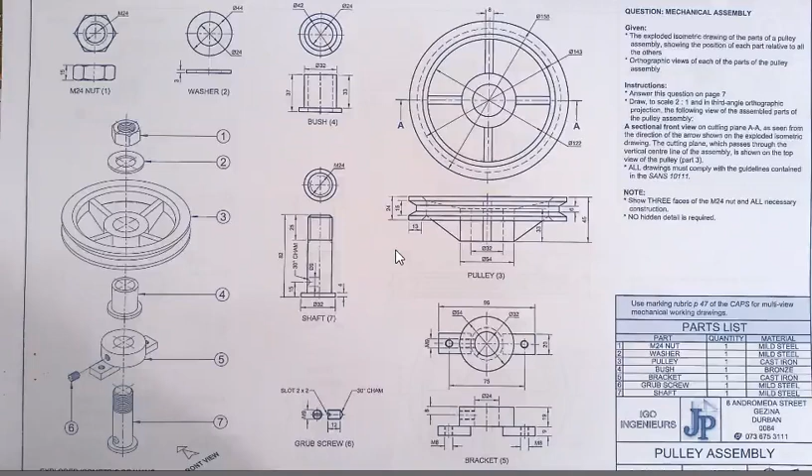Okay, graad 11, grade 11, so I'm gonna show you guys what to do. Okay, so eerste dinge eerste, we need some steps to answer this thing. We're gonna do this over 2 days, and then you should be able to do an assembly drawing.

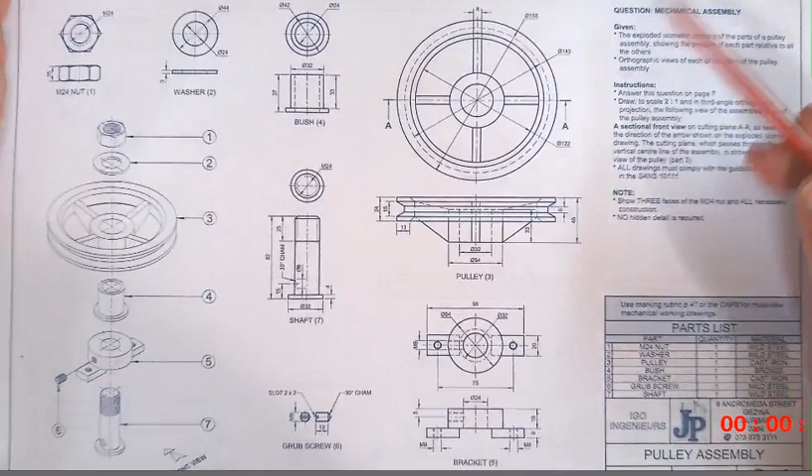Okay, first of all, if you get a drawing like this, the first thing you do before you do anything else is you go and have a look at what's down here. This is your first step. Okay, so right here, this is step number 1. You have a look at what is provided. Very important, you check what is the front view. This is very important. So jy gaan daar vir jouself skryf wat is voor.

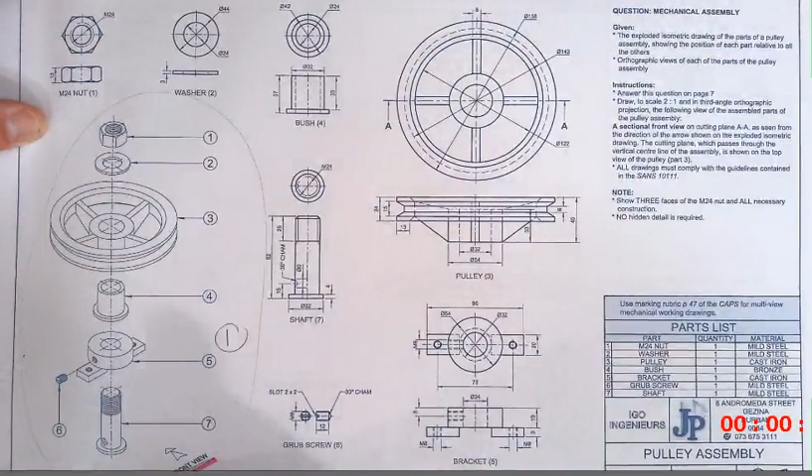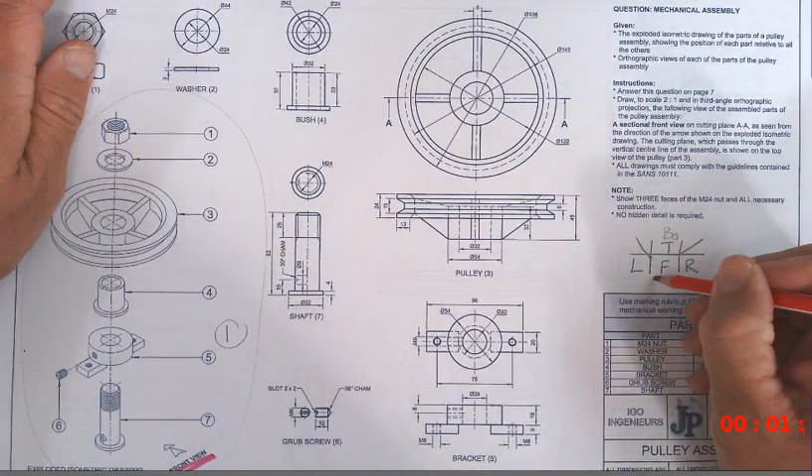So hulle sê vir ons, they tell us that this part fits through that part. We can see it. You see a little hole there. We analyze this. We see this hole has thread in it, so that can go in there. We see a little hole there at the bottom, which tells me that most probably this screw is going to end up within that thing there.

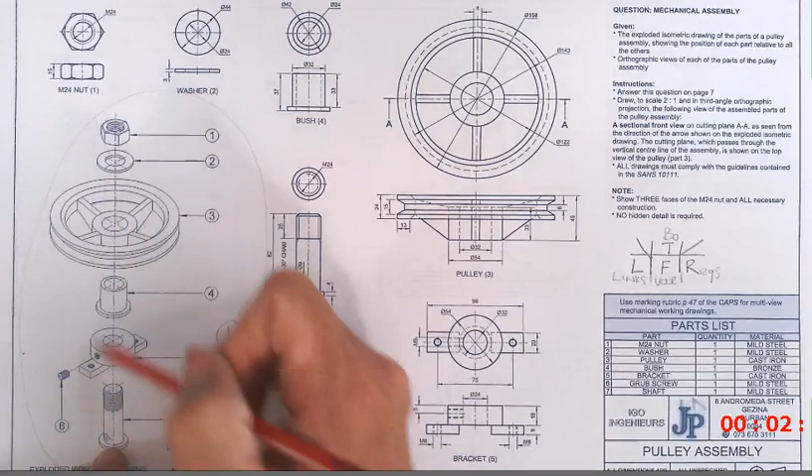Okay. Then we have a bush. This part, it fits into the pulley. We've got a washer on the top. We've got this screw thread protruding through the pulley and through this part at the bottom, through the bush, and the washer is going to be on the top, and the nut is going to turn onto this thing. Okay, so this is basically what's going to happen. All these things are going to be compiled into one object, and then we're going to cut it.

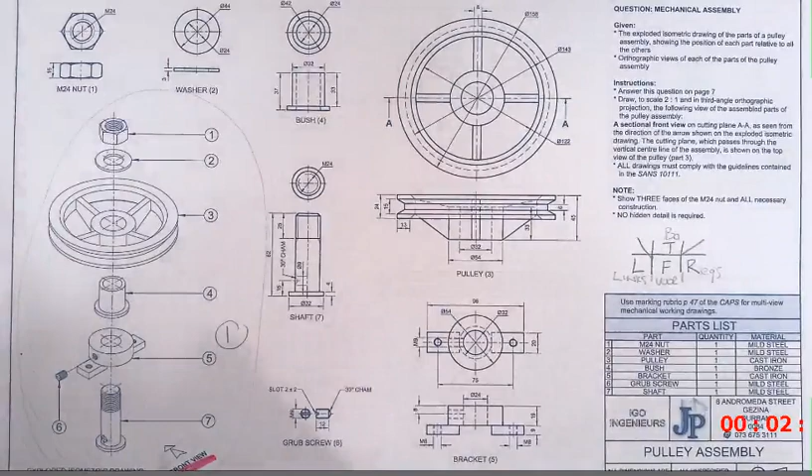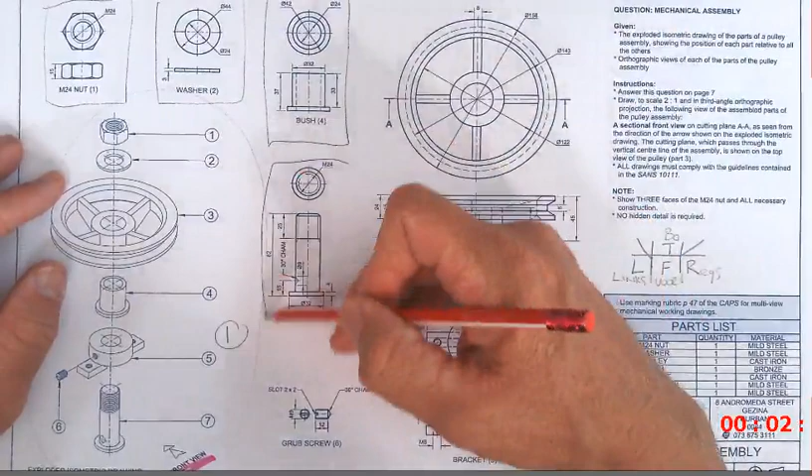So let's quickly read the question. Die vraag sê, the exploded isometric drawing of the parts. Orthographic views of each of the parts of the pulley assembly. So you guys can do this. This is one part, number 4. This is one part, number 7. This is one thing, part number 3. This is one thing, part number 5. And this is one thing, part number 6. Okay. Daar is jou verskillende parte, né?

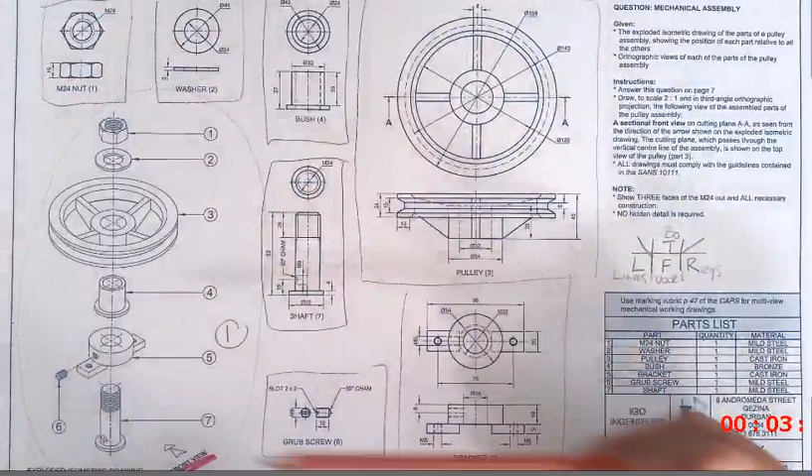Now in each instance you get 2 views of the part. Okay, so jy kry 'n voor en 'n bo-aansig, front view and top view. We get the front view and the top view, front view and top view. Okay, nou, hier's belangrik. Nou sê hulle, answer this question on page 7. Draw to a scale of, this is important. What scale do we need to draw?

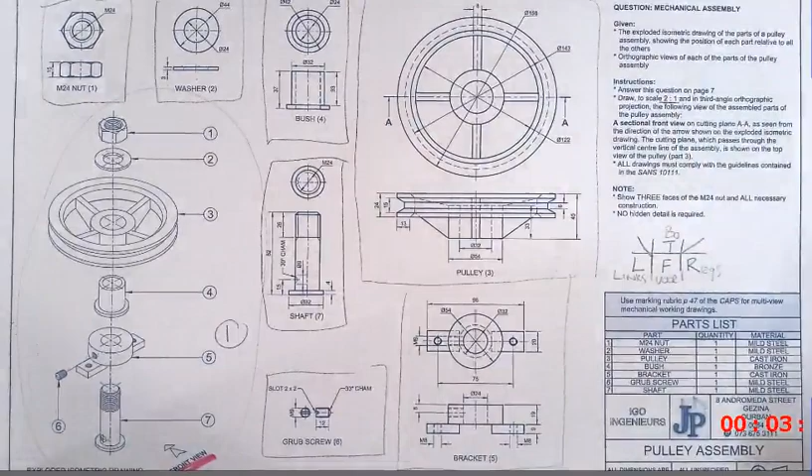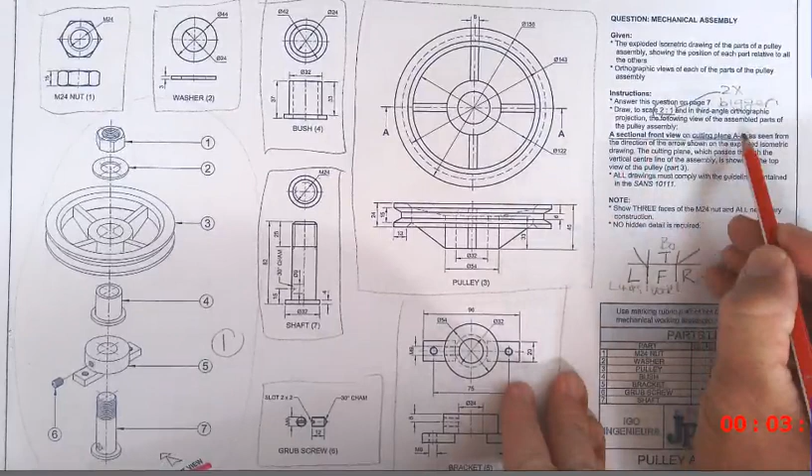2 tot 1. Wat beteken 2 tot 1? What does that mean? 2 times bigger than the provided measurement. Nee, so skryf dit vir jou neer daar. Dan sê hulle vir jou teken a sectional front view on cutting plane AA. So let's see where is cutting plane AA. Daarso, nee. Nou wat beteken dit? Dit beteken hulle sny presies in die middel.

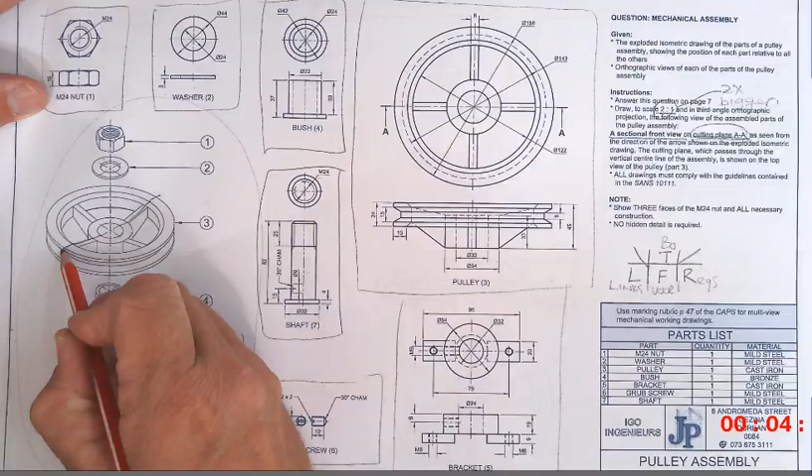What type of section is this, Baraka? This would be a full section. Well done. And so my section, if this is the front view, it would mean that my section is going to pass through here. Julle kan dit inteken daar. Going to pass through this whole thing. It's going to pass through that part there. It's going to cut through everything. It's going to cut through this part.

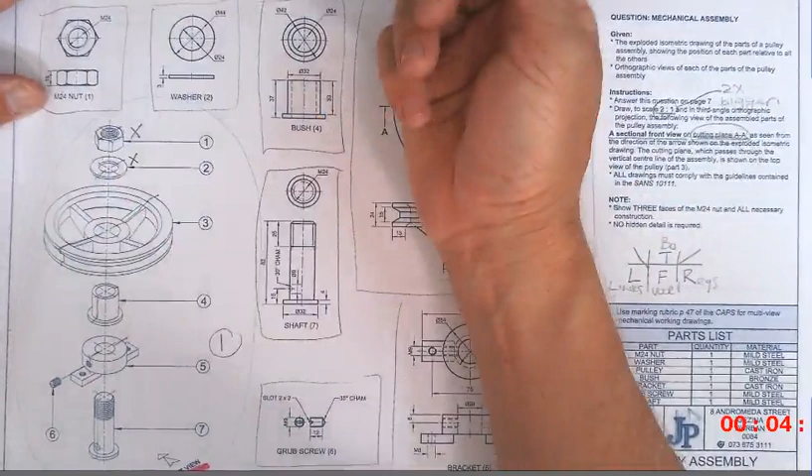It's going to cut through the bolt, although we don't cut this. It's going to cut through the washer, although we don't cut it. And it's going to cut through the nut, but we don't cut it. Okay, so let's quickly see. We don't cut the nut. We don't cut the washer. We don't cut the bolt. What type of section are we going to use around that thing? Wilmien, ons het gister gesê, wat se tipe arsering gaan rondom daai gaatjie wees? Mooi. There's going to be a part section.

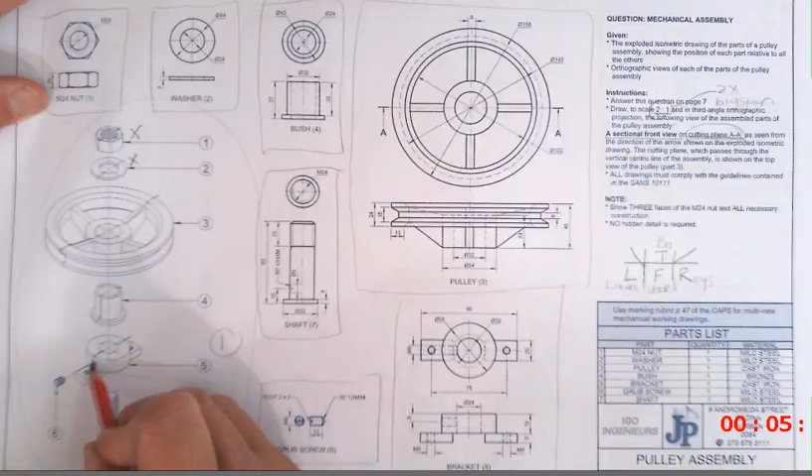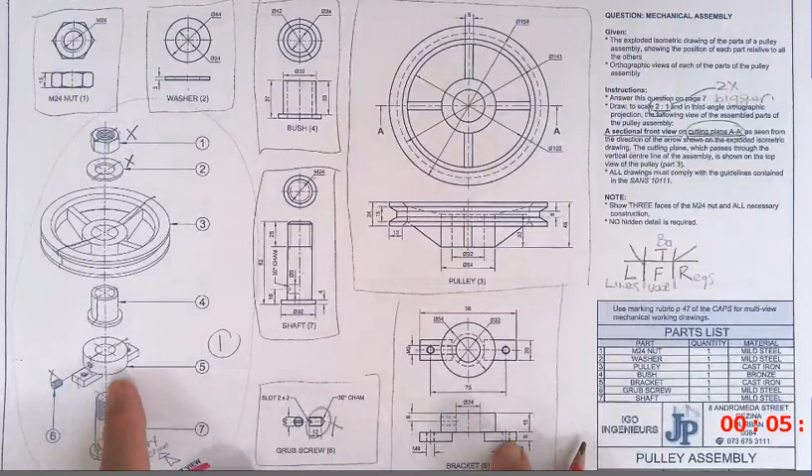We're going to cut everything and then we're going to put it together. So wat julle gou vir my skryf is, maak 'n kruisie daar, nee, we're not going to cut this, encircle that view because this is what you see from the front. If you guys look at this is part number 5, we're going to see this view. Okay, so daai ene kan jy omkring, hy gaan gesny word.

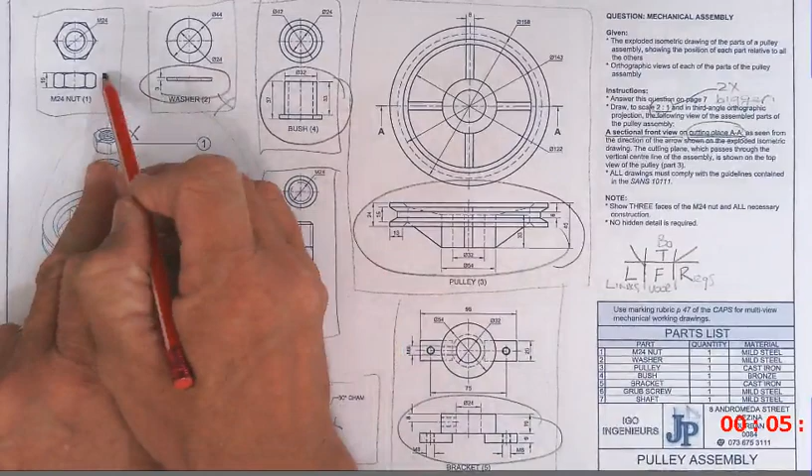We're going to cut this thing here, the bush. Okay, we are going to cut through the pulley, which is this one. We're going to have the washer, but we're not going to cut the washer. We're going to have the nut, but we're not going to cut the nut.

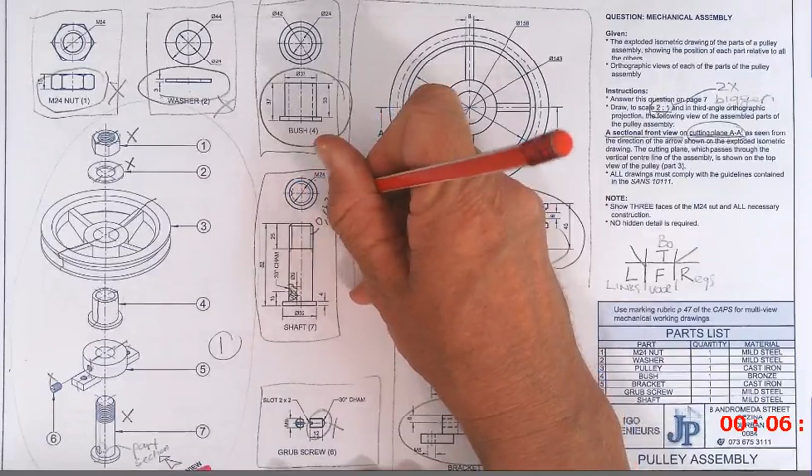You guys are going to do a part section there. Going to hatch around that little thing there. The screw thread here is going to be, write this in, 0,1 times 24. Why? Because it's a M24 bolt. Wat beteken dit? M24 means that it's from that line there to this line there, it would be 24. Het julle dit? So the screw thread there is going to be 0,1.

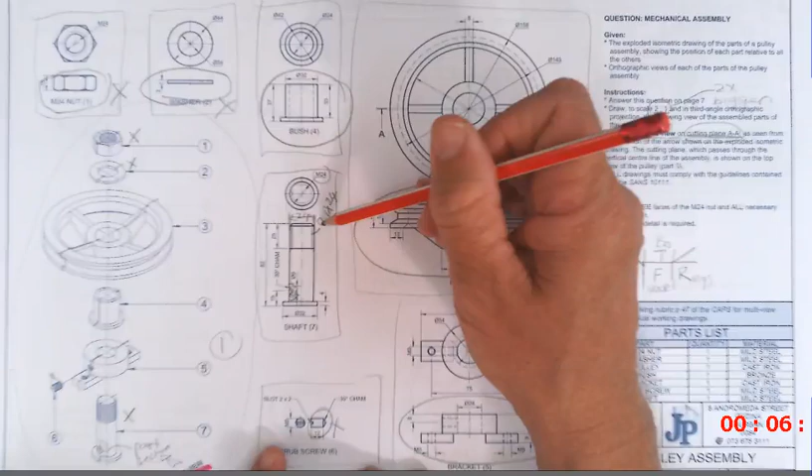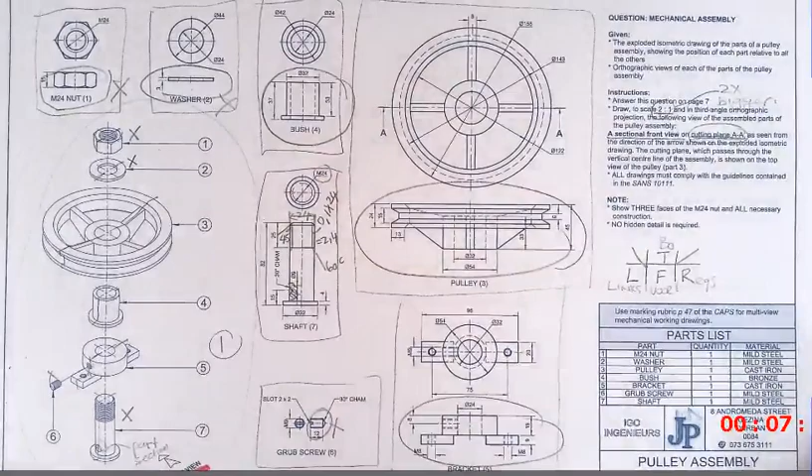What is 0,1 times 24? Equals 2,4. Okay, this is going to be a 60-degree line. That is going to be a 45-degree line. Okay, julle, nou kan ons begin om te teken. So ek wil gou vir julle vra, waar begin ek nou? Where do I start with my drawing? I need to draw the sectional front view. Okay, wat moet ek nog teken? Anything else? No, that's the only thing that you have to draw.

Okay, so kom ons kyk gou, hoe gaan ons dit doen? Ek gaan hom gou vir julle mount, gonna mount it for you. Okay julle, so we are back. I'm gonna quickly show you guys what to do. Unfortunately, I have to work with a ruler and a triangle.

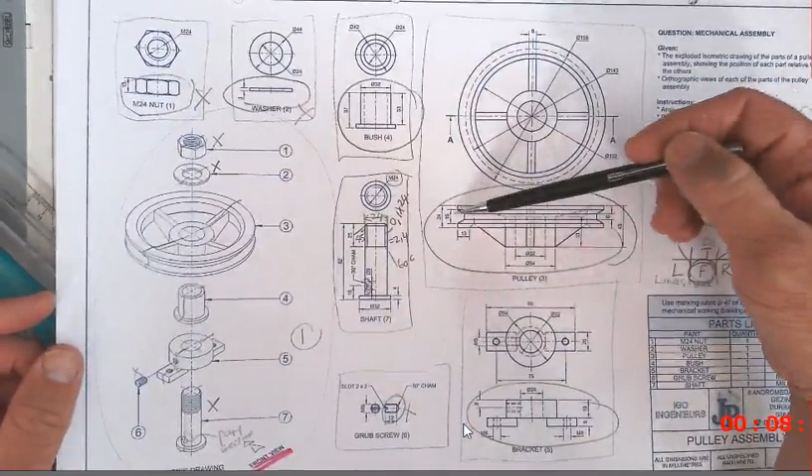But what we're going to do is we are going to start this drawing off. So the question is, where do we start? You see right through the middle there's a center line. Now I would obviously probably start at the top, and I'm going to start with this view here. And if we cut through something, we're going to keep the outline, that's one way of doing it. You can start with the biggest part, or you can start with a shaft. That's also a nice place to start.

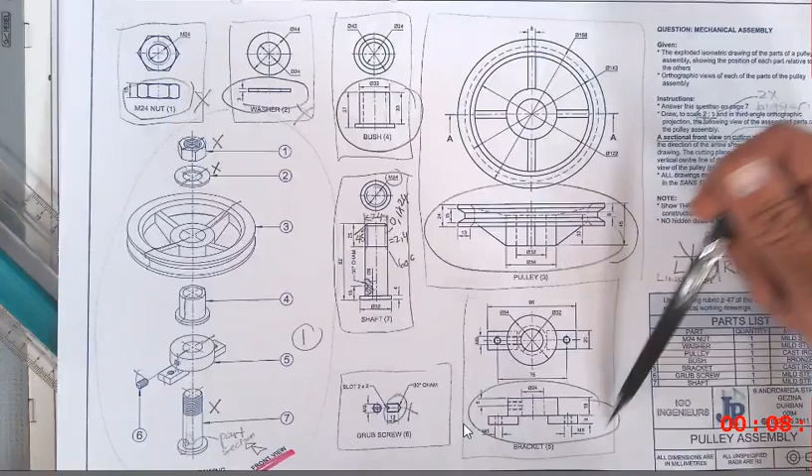So if we start with a shaft, or with this part here at the bottom, these things will all be assembled. So this is going to go into that part. So I'm going to start with a bracket this time. This part number 5. You can start in one of many places. Ek gaan daar begin. Remember, we need to double up everything. So the 24 becomes 48, etc. M8 becomes M16. So I'm going to start with this part. You guys can do this with me. I'm first going to draw the outline.

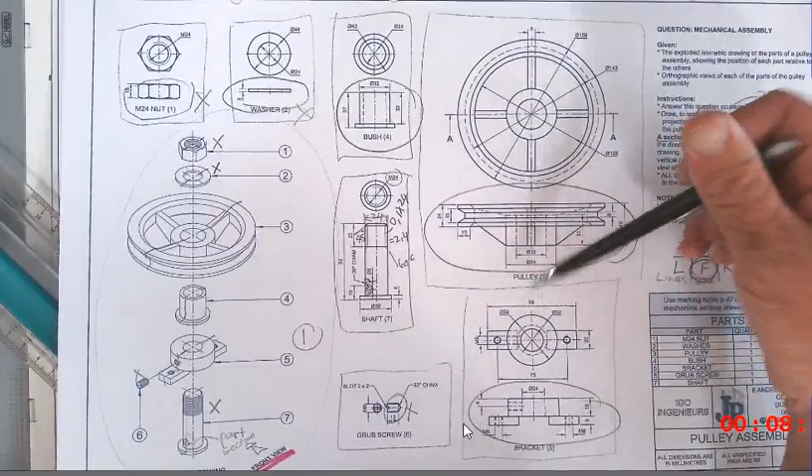And the measurement there is 96 times 2. Wat is 96 maal 2? Minus 8. So 200 minus 8. Wat is dit? 192. Is ek reg? Let's quickly check. 96 times 2. 6 times 2 is 12. 2 times 9 is 18 plus 1 is 19. So this is going to be 192. You guys can write this in.

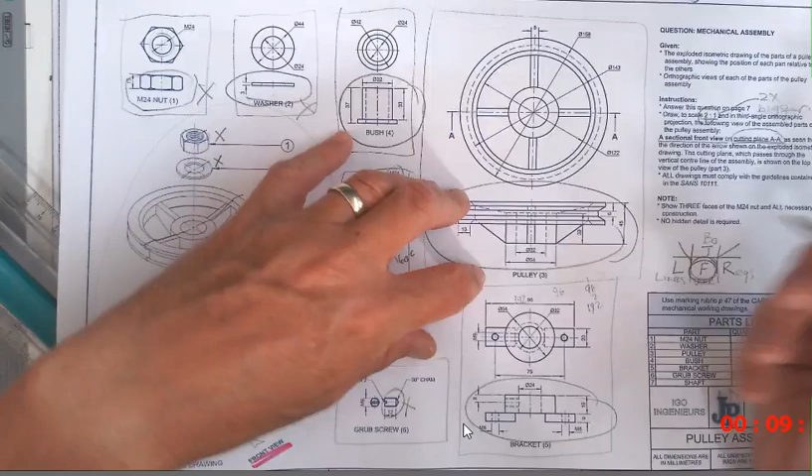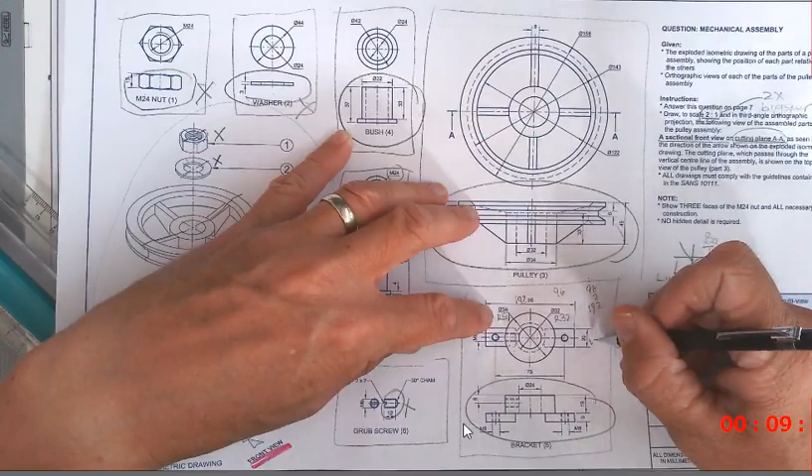This is going to be 54. Double that. What is that going to be? Oh, it's okay. Just write there radius 54, which is half of that. This is going to be radius 32. Hoekom? Because the diameter is the full thing. So this is going to be 64 diameter, which is radius 32. Okay, this is going to become 40. This is going to become M18. Okay, the thread, that 75 is going to become 150.

So I'm going to start off with a center line. I'm going to have to draw this view here. It's going to be 192 from the one side to the other side. So ek gaan daar begin. Eentjie van onderaf slightly. Well, first let's get the middle of the page.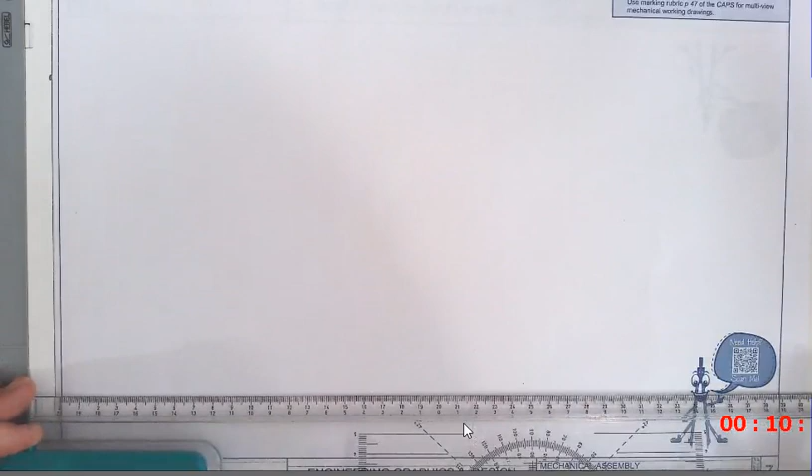So it's roundabout 400 millimeters. So I'm going to here by 200 roundabout. There by 180. I'm going to make a mark here.

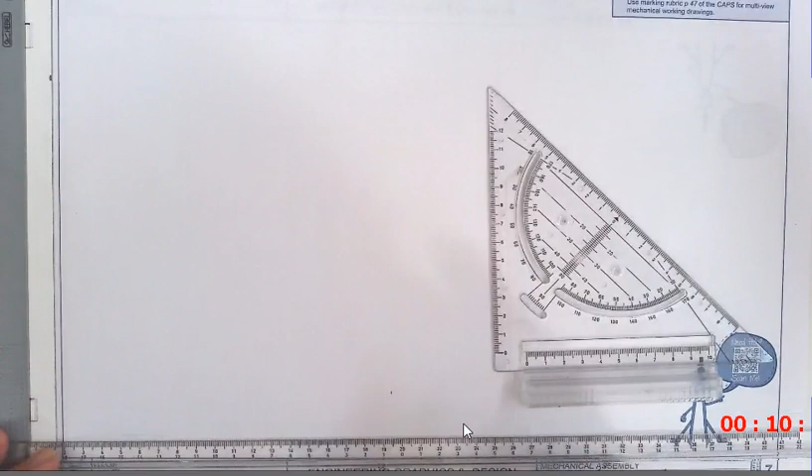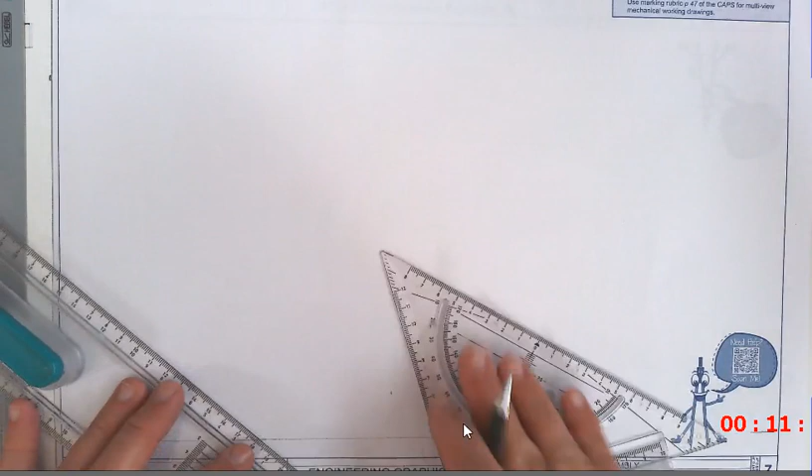Okay. Right, so I'm gonna be drawing a line here at the bottom just because my drawing ruler, this is not the correct ruler for this board. Just gonna draw a line here at the bottom. Alright, now you'll see my line is slightly angled, and I'm gonna line it up still here on the board. Okay, I'm gonna draw a center line here in the middle. Very important. So center line here in the middle.

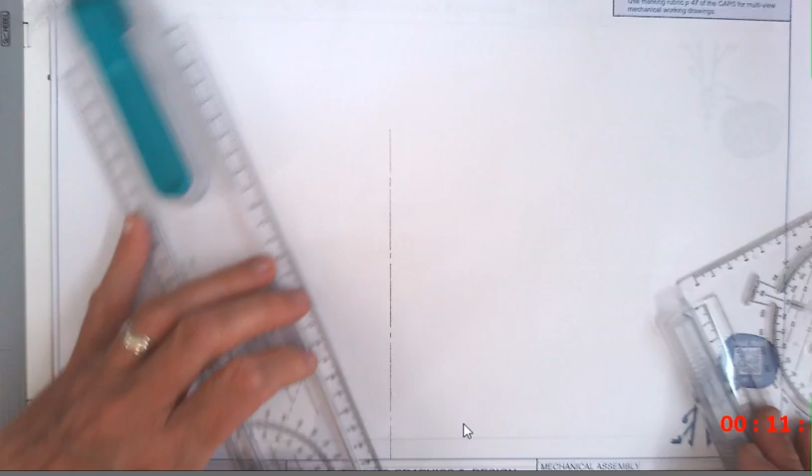Okay, now I'm making a center line. I need to have a center line. Why? Because this is my reference from which I am going to work. It's always the best to have a center line when you're starting off. Okay. And now I'm going to start with this part here. I'm going to start slightly up. It needs to be 192, so it's going to be 96 in both directions.

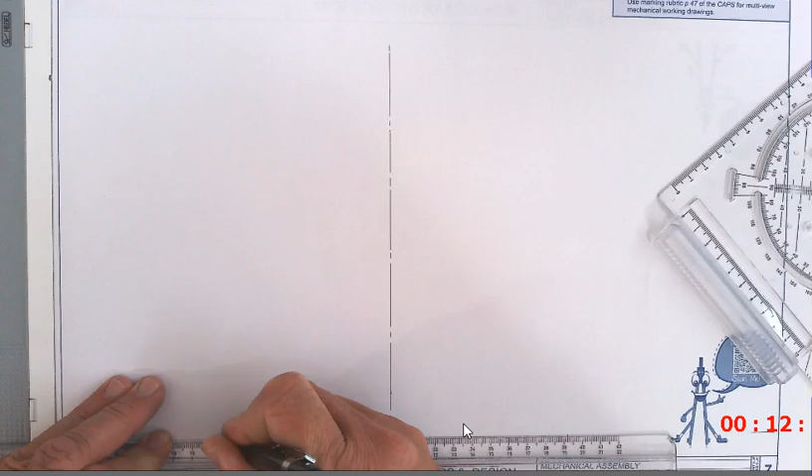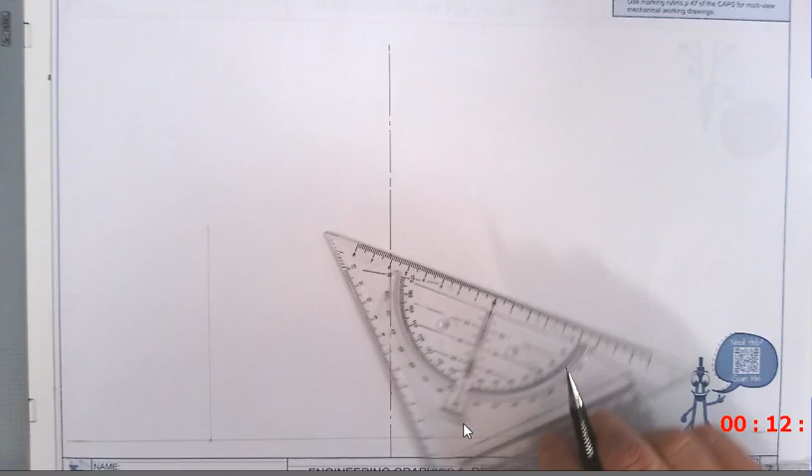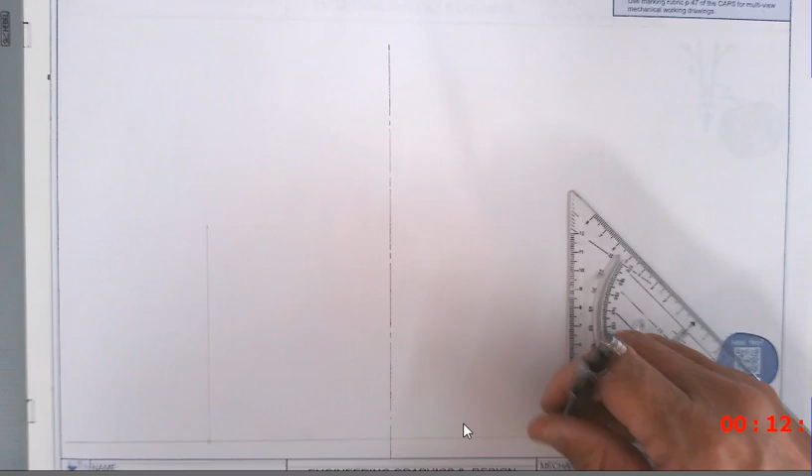96. Okay, so 10, 20, 30, 40, 50, 60, 70, 90. There's 96 millimeters. I'm going to do the same on this side. Okay, so here's my bottom line. 96, I'm just going to make a construction first. So I'm going to draw a construction line on this side. I'm going to move it up. Draw it on this side.

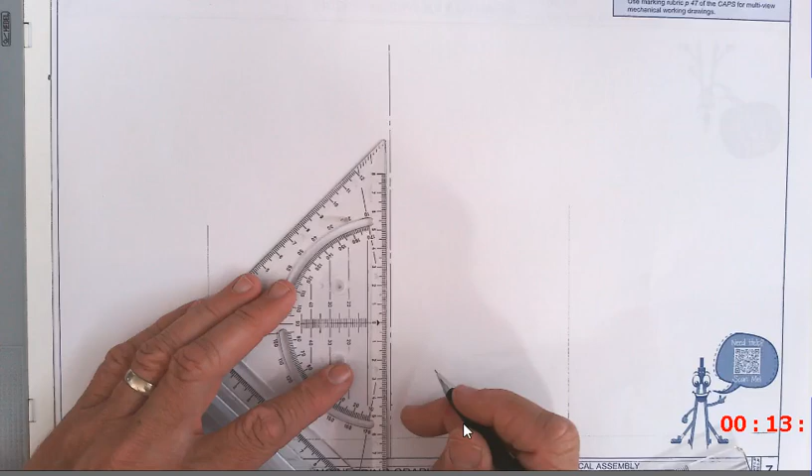This is going to be 18 and this is going to be 19 times 2 is 38. Am I right? That's going to be 38. So 18 plus 38. 18 plus 38. 10, 15, 16, 17, 18. And then another 38. 10, 20, 30, 35, 36, 37, 38. There it is, 38.

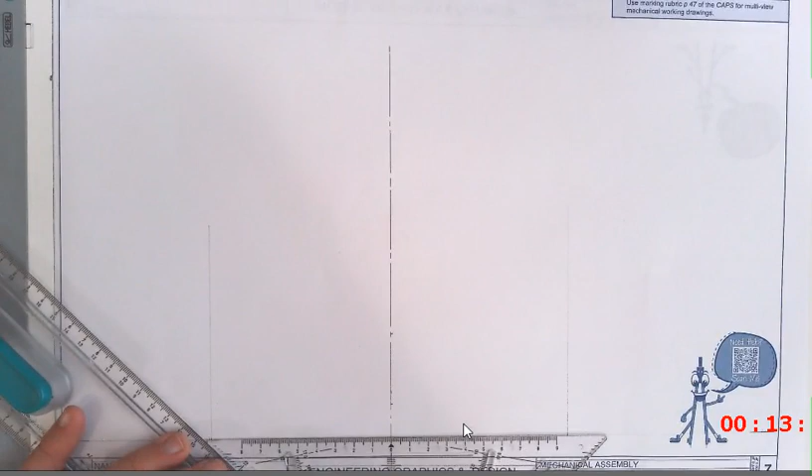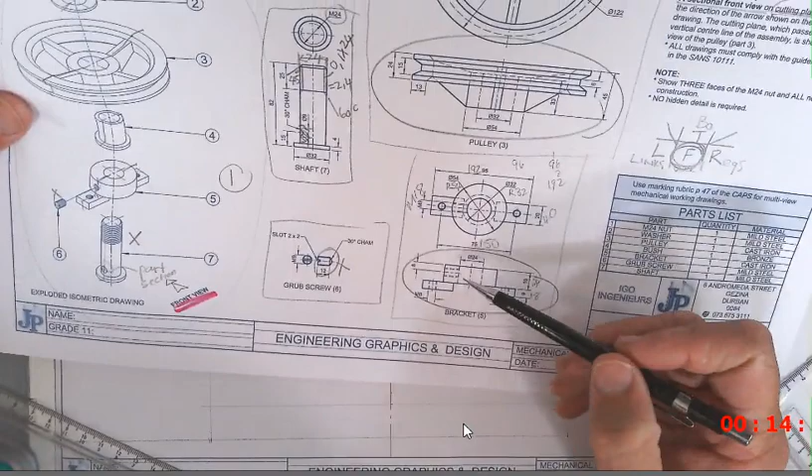Okay. Alright. Let's start off here. We're gonna draw a construction line here. Just construction lines first. Remember, we are drawing against time. So every second counts. Okay. So try and keep your drawing time shorter. Okay. We spoke about this.

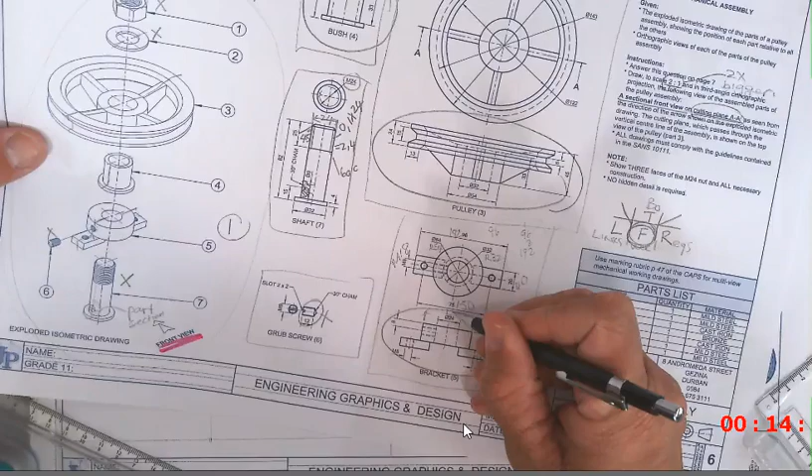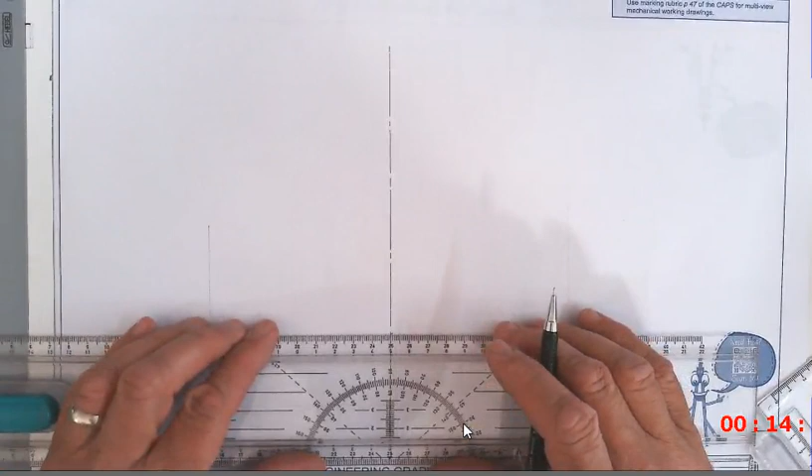This is going to be a radius of 54. But that 54 times 2 gives me what? 108, am I right? So this distance should be 108. 54 times 2. Is it right? 108. Let's quickly draw that in. So it's 54 in both directions. So we can quickly do that on this side. 10, 20, 30, 40, 50, 54 on this side. Okay.

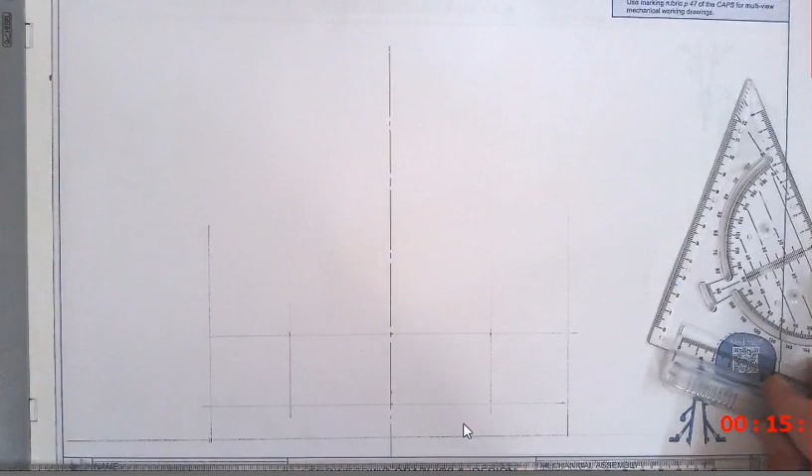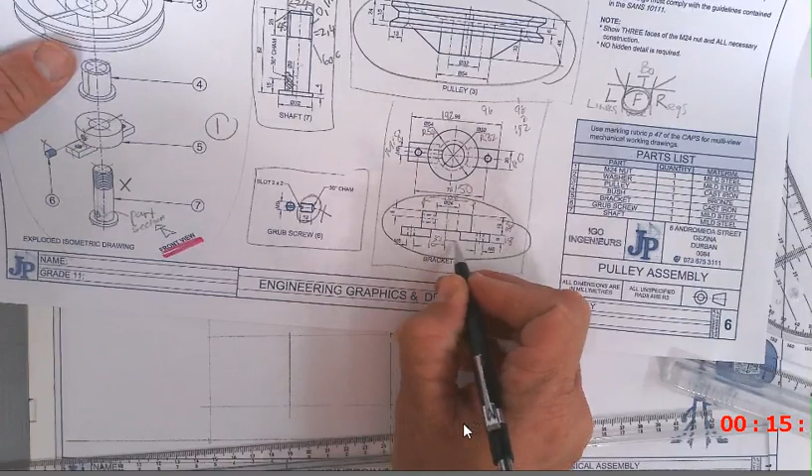That is radius 32, so that's going to be 64, so it's 32 to this side, 32. So this is going to be, from the center, 32 to the left and 32 to the right. Okay.

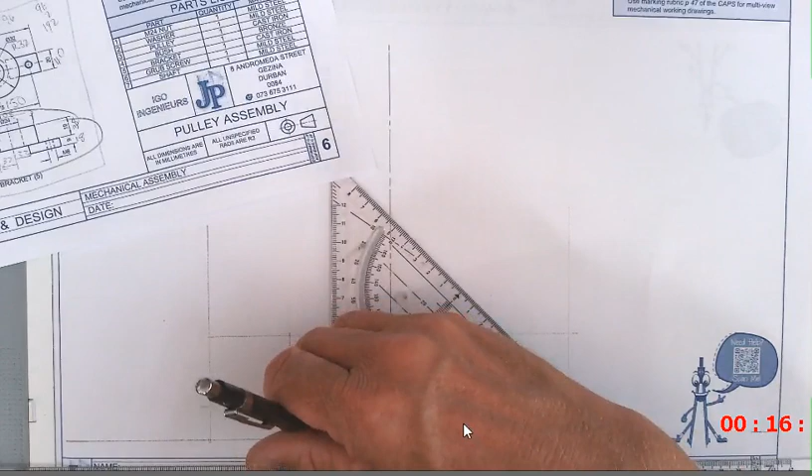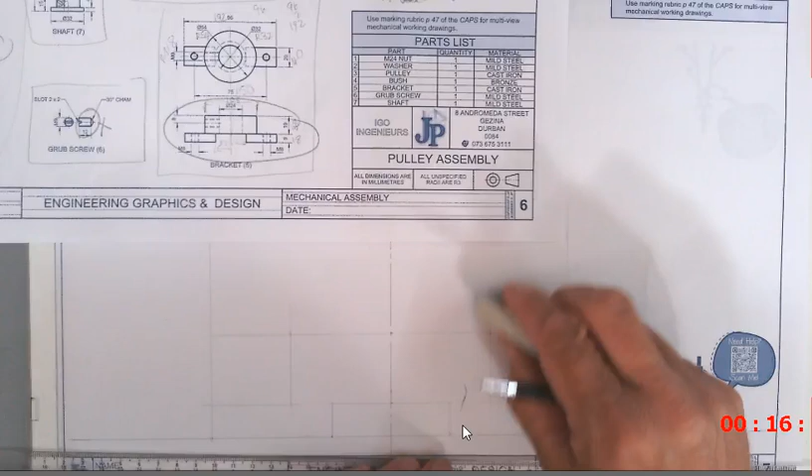Okay, now we have the outline of this thing. Now we're going to quickly cut this thing through. And remember what I told you guys, if we're going to cut this through, we're only going to keep the outline. So I can remove that line. You don't have to erase the whole thing. You don't have to erase construction lines, but just for clarity. I'm just doing it so it becomes more clear.

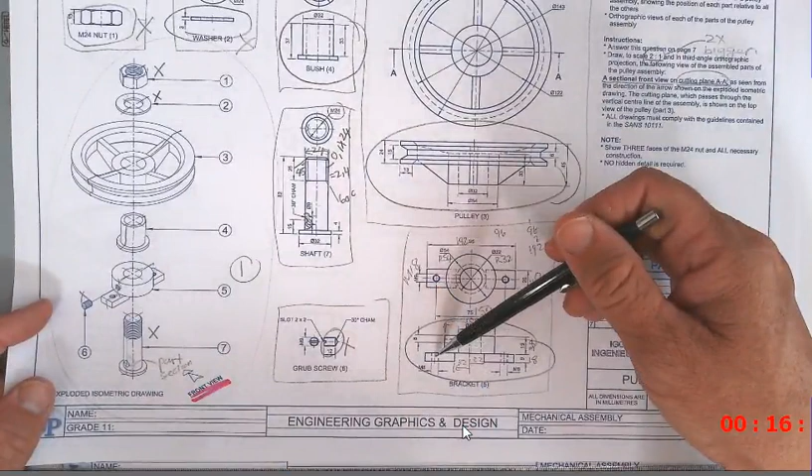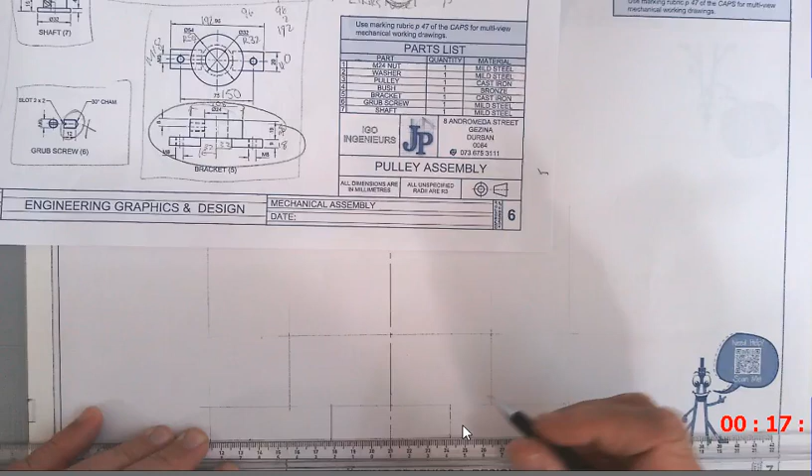Okay, so this is this bottom part. I've cut this thing through in the middle, there. I'm going to cut through the thread there and there, which means that that M8 is now M16. So that is from the side. Let's quickly have a look. It's going to be 75 to the one side and 75 to the other side because it's times 2. Let's quickly measure that off. 10, 20, 30, 40, 50, 60, 70, 75 is here. And then also 10, 20, 30, 40, 50, 60, 70, 75 this side.

Now I'm going to put in a center line.

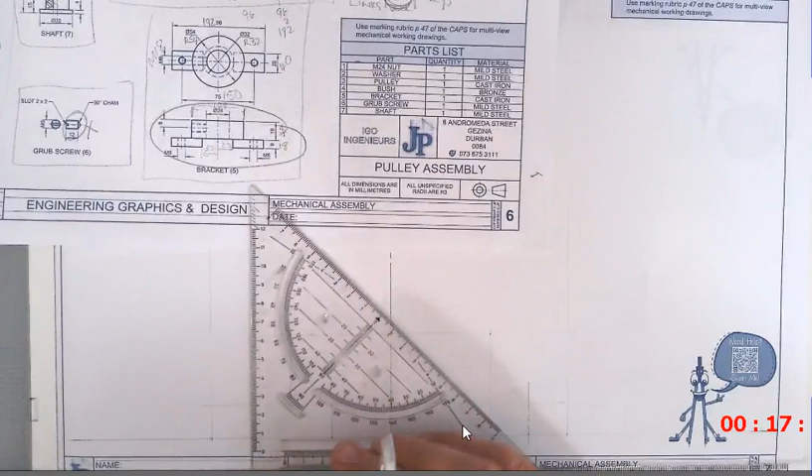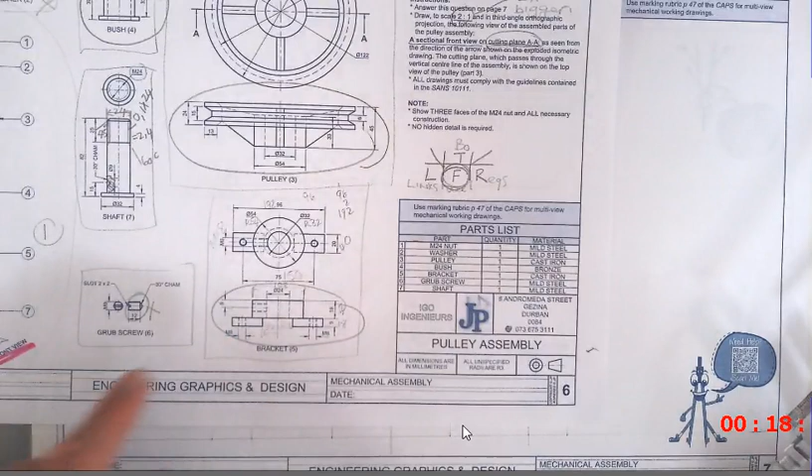Because it's the center of something round. Okay, we always put a center line where it's the center of an object or when there's going to be something round in shape there, like a circle or a hole or something solid. Okay, that's going to be M8. So that means M8, a bolt that is double that size will fit in there. Why double? Because it's scale 2 to 1. So that becomes M16. So I'm going to measure 8 towards every side here.

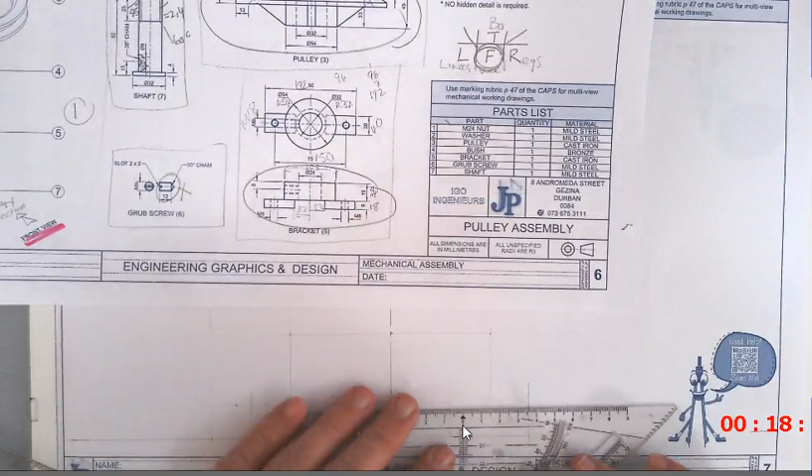On this side, I'm going to do the same on this side. 5, 6, 7, 8. 5, 6, 7, 8 on this side. And because I'm cutting through this hole, this will be a solid line. I'm going to show you guys in a moment why.

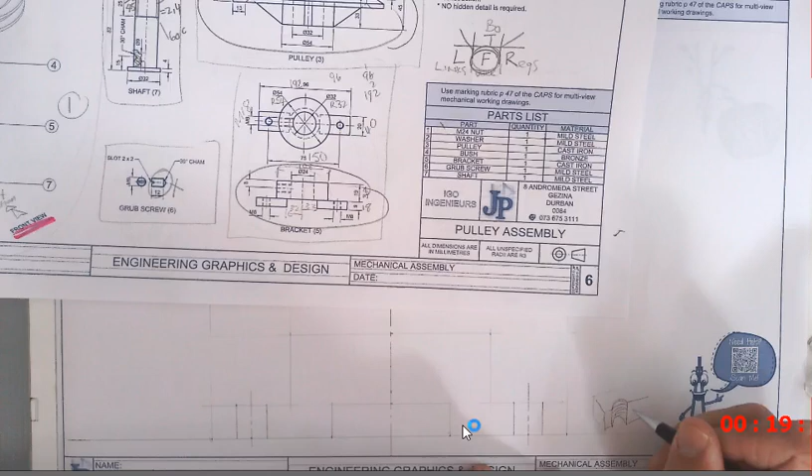I've cut this thing through now. And the thread is on the inside here. Okay, and you're going to have a double line here. Why? Because it makes a zigzag pattern there in reality. Makes a little zigzag there. And that zigzag line is drawn as a double line. But I am still having a circle there at the top and a circle at the bottom. That's the reason why there's going to be a line there.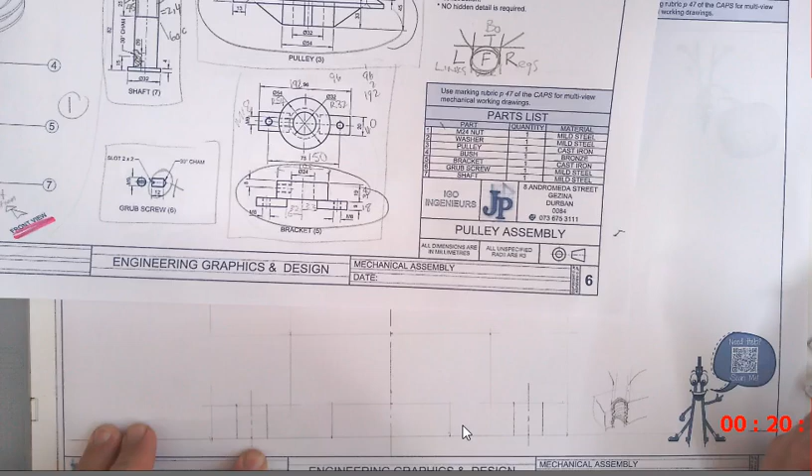That's that line. This is the bottom line, and the thread will now have a size. Because M8 is going to become M16. So this hole is 16 from the one side to the other side. The thread here will be that size divided by 10. In other words, 16 divided by 10 is 1,

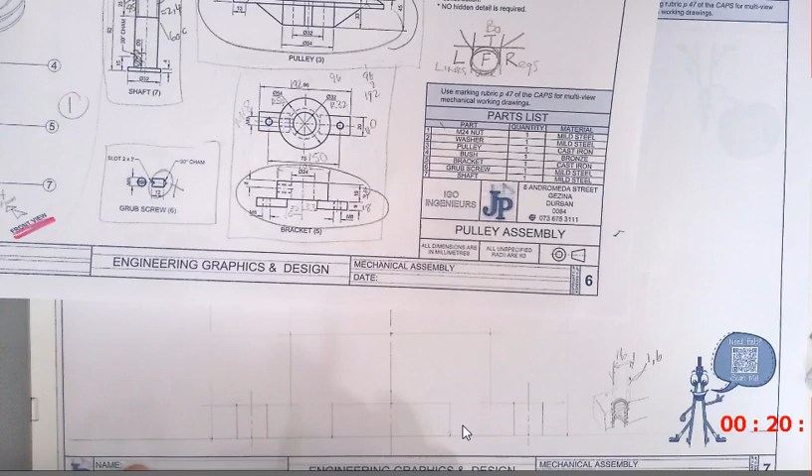So 1,6 on the one side. Inward, it's basically 1.6 millimeters.

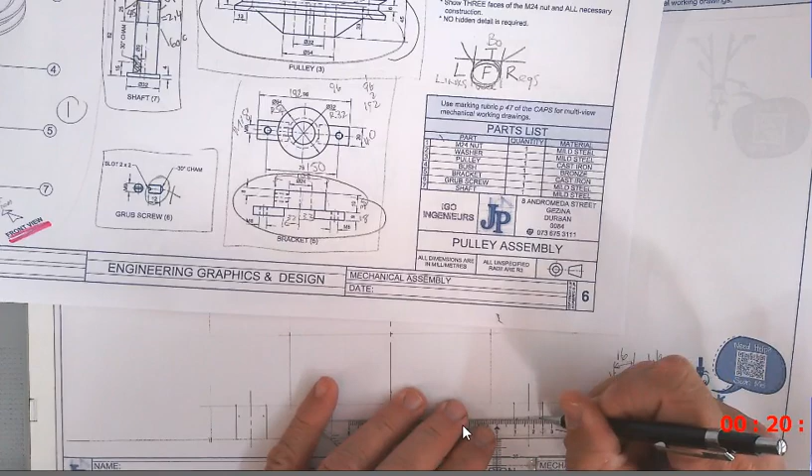This is going to be slightly faint.

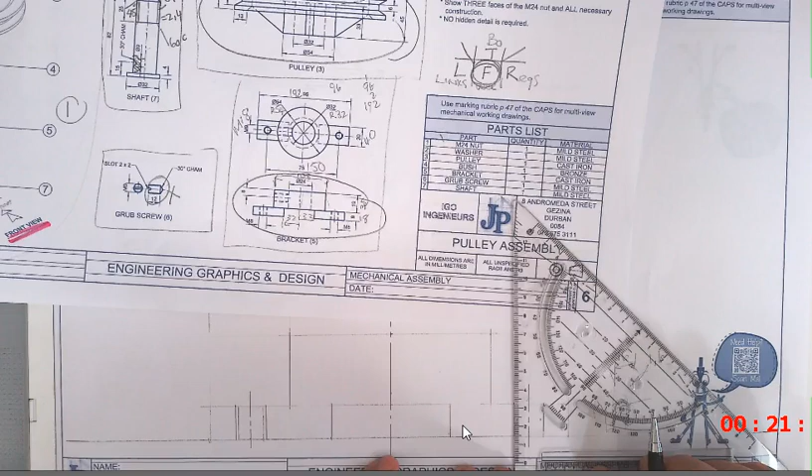Okay, so daar's die skroefdraad, there's the screw thread.

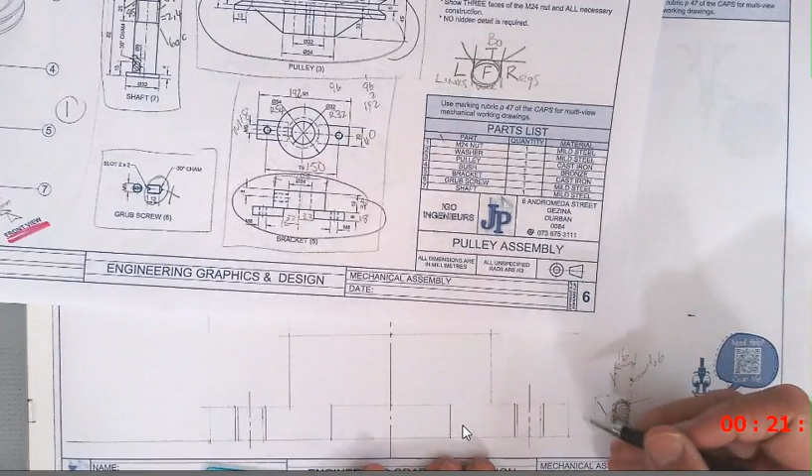Sorry guys, I see the screen is almost impossible to see on. If you guys want to come and stand here around the desk, you're most welcome. I see you cannot see. I'll be uploading this at the end of the period anyhow to YouTube. But please come and have a look here by my desk, otherwise you're not going to see anything.

Okay, so I'm going to measure off. This measurement is 8 times 2, which is 16.

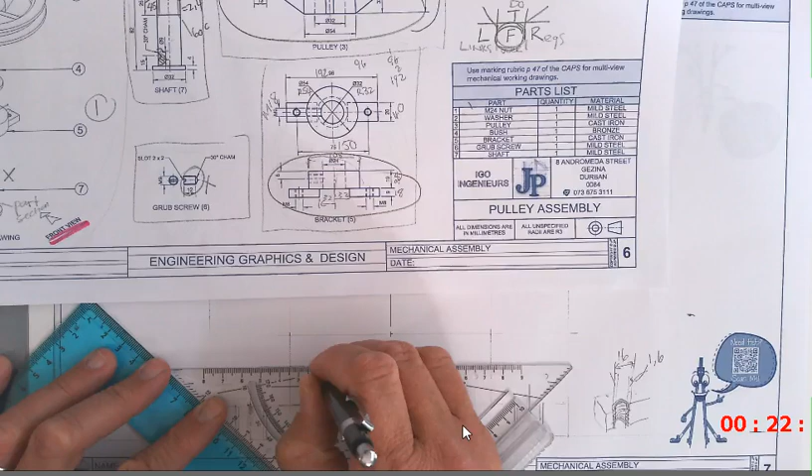And I put a center line in here. Okay. And here's a binnekant, there's an inside here. It's going to be diameter 24, so I'm going to measure 24 in both directions. 24 this side, 10, 20, 24 that side.

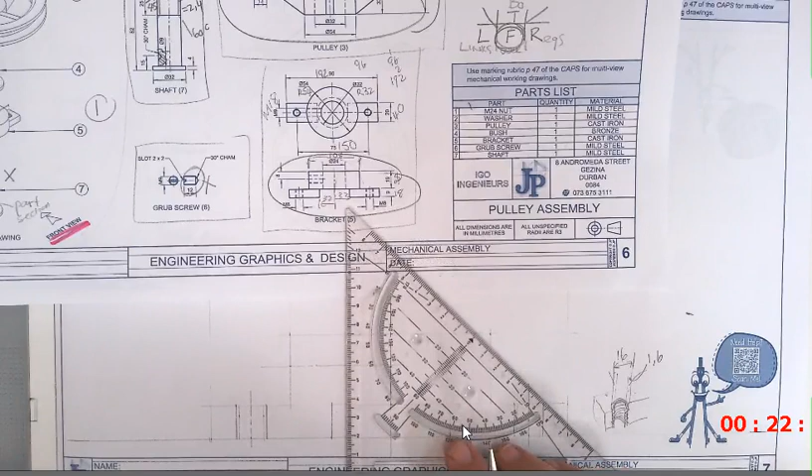Okay, ek wil hê net tot waar ons is, just up to where we are now. For homework for tomorrow, it's not a lot, and like I said, I'll upload it for you guys now. So please work up to where we are in this period.

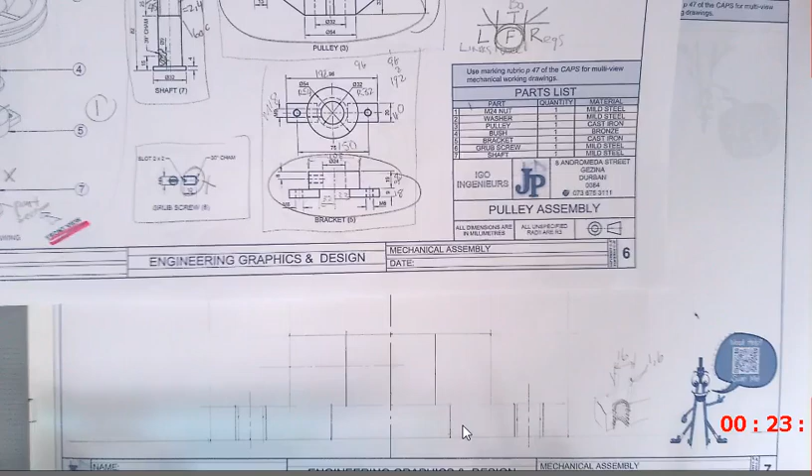I cannot keep it here. There's not space for everything.